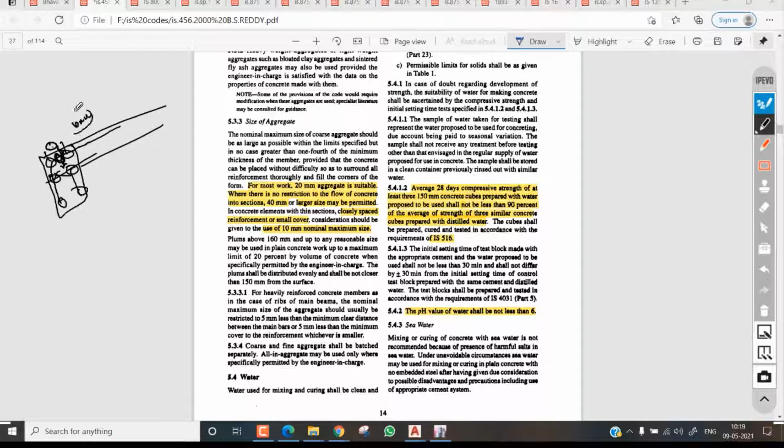If you use a 20 mm aggregate, it will not pass through this. Okay, it's very hard for it to pass between these two rods. At that time, you need to go for a 10 mm aggregate. I hope you understand this. Like that, we need to study and judge at the site. So suppose anywhere you are getting heavy reinforcement, at that time you need to use this 10 mm aggregate. Okay.

Okay. And here, the average 28 days compressive strength of at least 3 150 mm cubes prepared with the water proposed to be used shall not be less than 90% of the average strength of 3 similar concrete cubes prepared with distilled water. So the IS code says you need to do it with distilled water, but at our site no distilled water will be available.

So whatever water will be available, we need to do the casting with that, and after that we need to test those cubes, some 3 sets of cubes, and those shall not be less than 90% of the average strength results. So suppose you take M20, you need to get at least 20 newton per millimetre square. It should not be less than 90%. So that's what the IS code says.

And if you go here, the pH value of the water shall not be less than 6. How can you know the pH at our construction site? We have a meter also, a pH meter. Let me show you that. Give me a minute. Yeah, this is a pH meter.

If you have quality control at your site, there you can see the pH meter. Suppose it's available at our site, this is a pH meter. Whenever you put it in some water, it will show you the pH, what pH range the water has. So it's showing you 8.5. Like that, at our site also we need to check that.

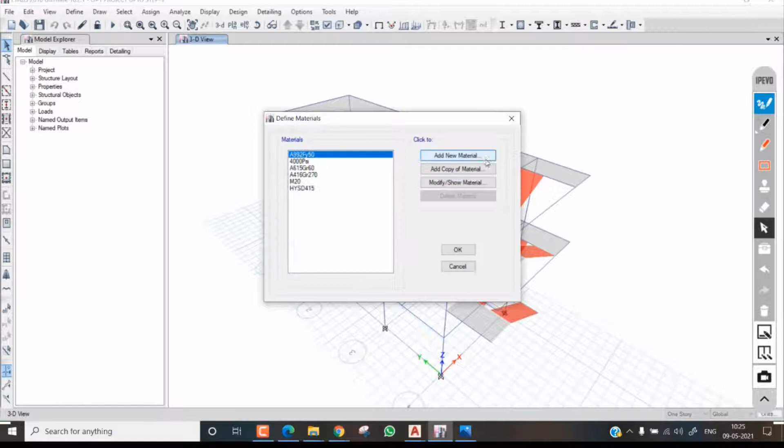If you go see in ETABS also, let me show you in ETABS. If you open ETABS, once you click on define, click on material properties. Once you click on material properties, just click on add a new material. I choose India here, steel, concrete, and Indian, and here M20 I will choose. Once you click on here, you will get all the material mass and mechanical properties.

See, modulus of elasticity E will be shown here. It will give you some formula. How you can get this value? This is a formula, 5000 into root over fck.

Based upon that, here is also the modulus of elasticity. From there also you will see modulus of elasticity, and how much is the Poisson's ratio, coefficient of thermal expansion, and shear modulus. So these are all things we will get from these IS code books.

But here in ETABS it will be the default value. But this value, where does it come from, how ETABS will calculate it? We already ran software with all the codings and these things built in. In that coding they mention if you want to go for the modulus of elasticity, you need to give it as 5000 into root over fck. Whatever fck we mention or choose, that will be automatically calculated here.

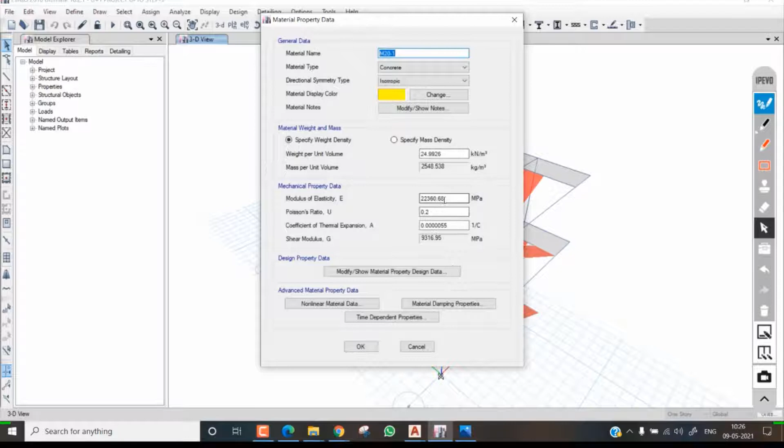Okay, I hope you understand it. Every software will be like this only. It will be already inbuilt in the software. All our code books will be inbuilt here.

So like that, total shrinkage strain is 0.0003, and creep of concrete depends upon the stress and the age, and creep also depends upon age and the duration of loading, and some stresses in the concrete.

And if you have an absence of experimental data, you need to go for the thermal expansion values. Here we have some thermal expansion depending on what type of aggregate it is, what is the thermal coefficient of expansion for concrete. So like that, and here is workability, and workability in the sense...

So if it is blinding concrete and shallow sections, and pavements using pavers, we need to go for very low workability. And here is mass concrete, lightly reinforced sections in slabs and beams, walls, and floors, so we need to go for low workability.

And if you go for pumped concrete, what is pumped? You need to know that. For pumped concrete, you need to go for high workability, so slump will be 75 to 100. How we can see, what is a pump? I hope some of you guys know this pumped concrete, some of might not know. So let me show you what pumped concrete is, how it looks like. Yeah, see this.

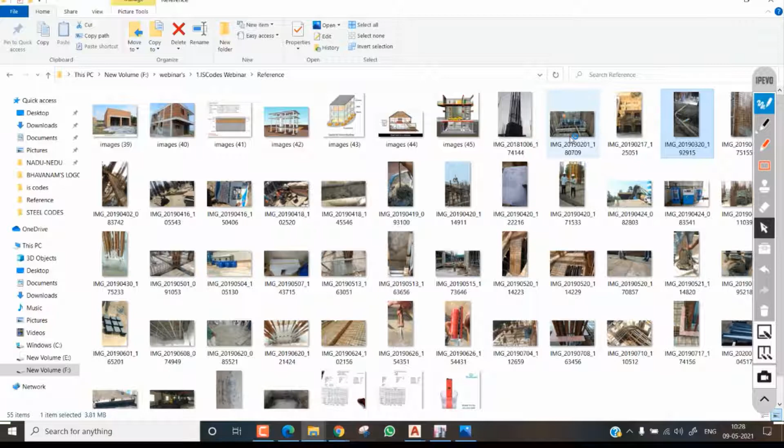Also another thing I need to show you - this is pumped concrete. So whatever is below, say in a 5-story height building, you need to bring that concrete mix by vehicle and pump it to the top floor. At that time you will lay the pumps. If you maintain proper workability it will be nearly some value - how much you mention, 20 or 75 or 50, 100. So how can that concrete flow into the top floor?

That's why whenever using this pump type, as a quality engineer you need to check it out. Whenever the mix design comes to the site, you need to take the slump cone and take some values from that, then do some initial testing. Suppose the concrete is flowing well, at that time you don't need to add any water, and then you can directly send it for top pumping.

Otherwise if the workability is not good, meaning the concrete is thick, you need to initially add some water in the mixer and just rotate it. After that you need to once again go to the top in that mixer vehicle, check if everything is clear, then send it to the site. Otherwise it will be a main issue.

But guys, one thing that happens on site - if you didn't add water in the initial stage downside, then at the top the site engineers working there will add the water. That is a main issue, and every time clashes happen between the quality engineer and site engineer. Site engineer always thinks about completing the work, but quality engineer makes sure that it will be quality.

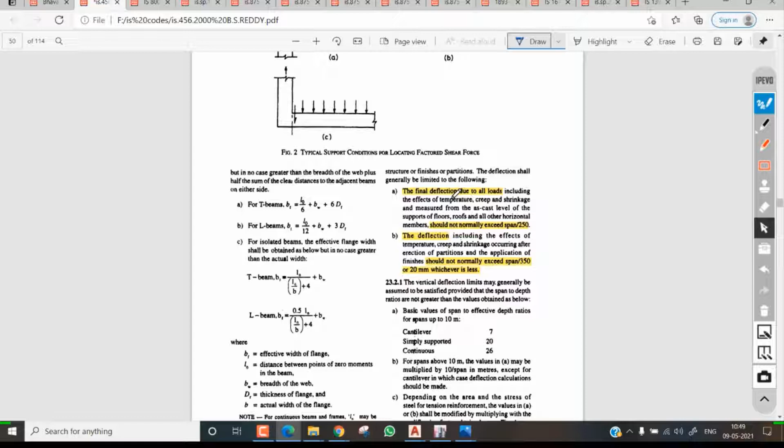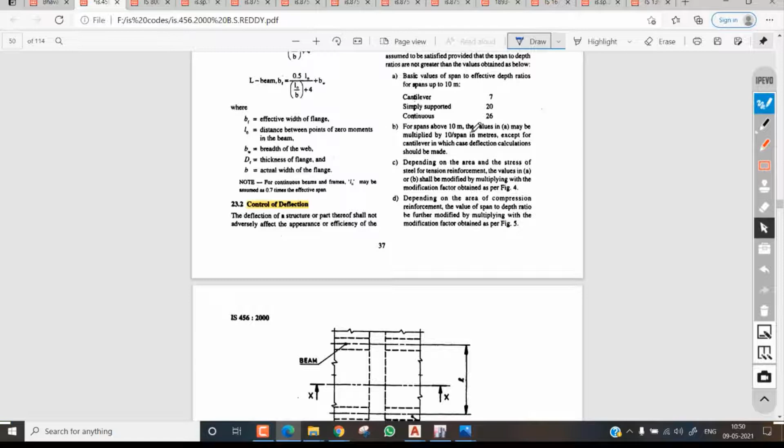And here is control of the deflection. If you want to do the control of deflection, cantilever, simply supported, continuous - based upon this, we will design a depth or whatever it may be. Okay, suppose span by depth, right?

So let me explain, this is a continuous span, so just length by depth. If you want to calculate the slab depth, so 26 - my slab will be 3 meters. At the time, 3 meters by 26, you will get a depth. It's the initial estimation of the depth.

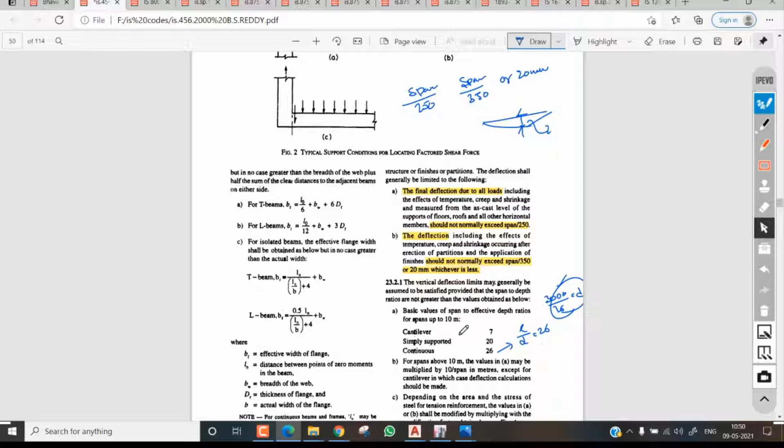Once you've done the analysis, then you will get the deflection ranges. If the deflection is more or less, then you will increase the depth, otherwise you can decrease the depth. That will be purely dependent upon the engineer's calculations.

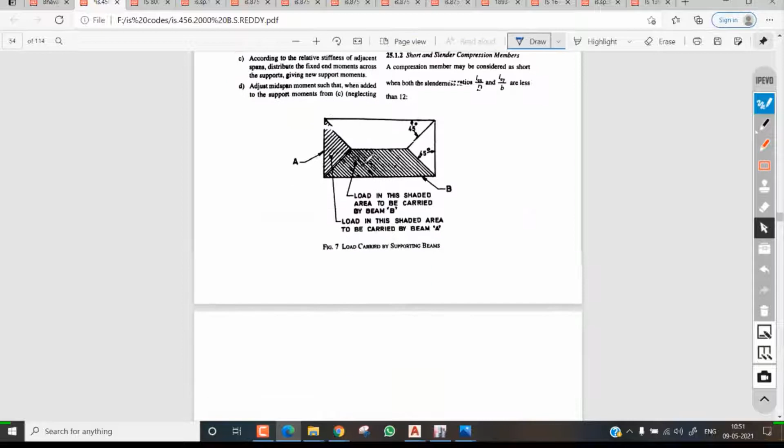And this spanning, slabs spanning in 2 directions designed by - see, this is one important thing, yield line theory. So every time, if it is yield line theory, suppose here we have a beam, and here we have a beam, and here we have a beam, and this is a slab, right? So this is a 2-way slab.

Yield line theory will always follow like this, and whatever the beam you have, so by this all the trapezoidal load will be acting on this beam, and this triangular load will be acting on this beam. Like that. Even though if you have another slab here, again it will be divided like this, trapezoidal and triangle.

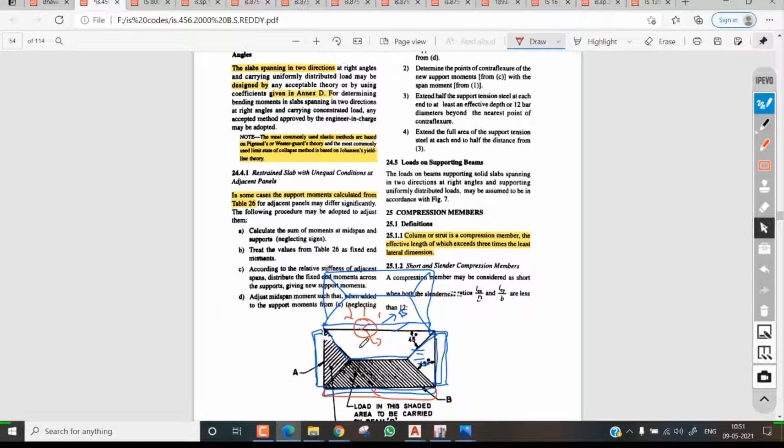So trapezoidal, all the load will be transferred to this beam. This beam may get higher bending moments as compared to this beam. Why? Because only one trapezoidal load will be acting here. If you take these two, so 2 trapezoidal loads will be acting here. So like that, and this is yield line theory.

Yield line theory is also main important, and we will use the FEM concept, the finite element method. So finite element - if you go for it, MTech students will know the finite element concept.

Development length in compression will be different, and this will be different. And let's go to the next one.